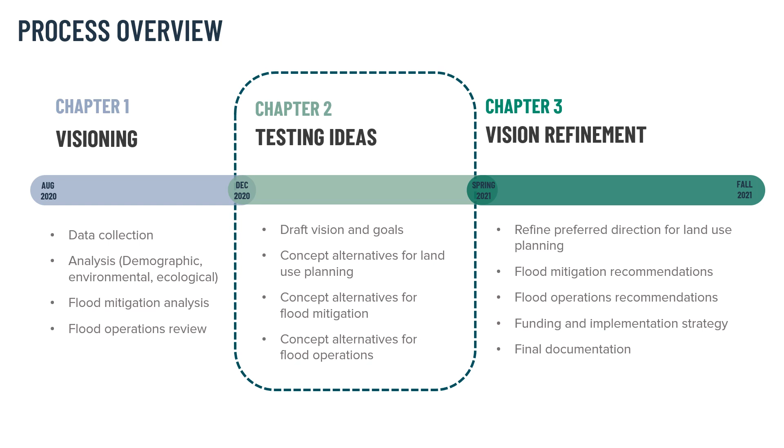The purpose of today's presentation is to describe and gather feedback on three main questions. First, what is being considered, including the priorities and guiding principles, the flood risks, and the type of solutions. Next, we'll go into the impact of flooding at a range of flood stages and consider the criteria to use when evaluating alternatives. Finally, we'll present examples of potential solutions that address two different levels of flooding.

The first is an array of options that would increase resiliency and reduce operational effort for major floods ranging from about 18 feet of stage up to 22 feet flood stage. The second set of potential solutions will consider a target elevation of flood stage 24 and what a continuous system of flood mitigation at that level may look like.

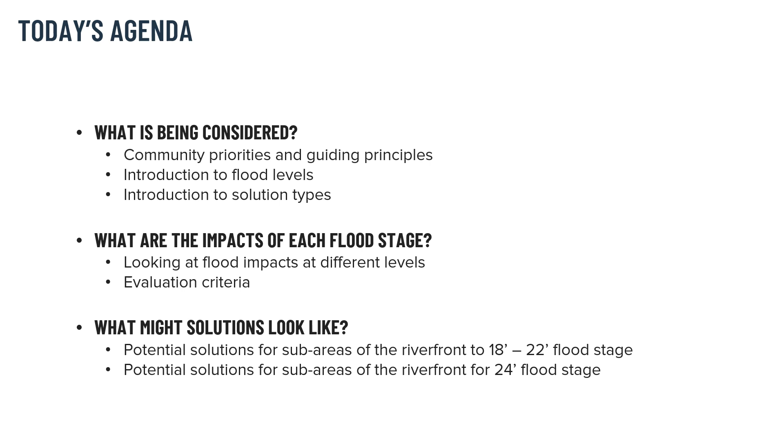So let's begin. Last fall, we reached out to a variety of stakeholder groups and the public through an online survey to ask a series of questions related to flooding, the city's flood response, and people's relationship to the river and the place where they live and work. These are some of the themes that came out of that effort.

When we asked people what the city's priorities should be in responding to high river levels, we heard access, specifically related to flooding impacts on transportation routes, the impact of flooding on businesses, community facilities, and infrastructure, and the impacts on people and residences. People noted many things that make Davenport special, including local businesses, outdoor spaces, relationships with the community, and the ability to get out and about.

When we specifically asked about how the riverfront could be improved to increase the number of visitors, we heard there needs to be more things to do, improvements to access, more natural areas to enjoy, some level of flood protection, and better maintenance and cleanliness of the riverfront.

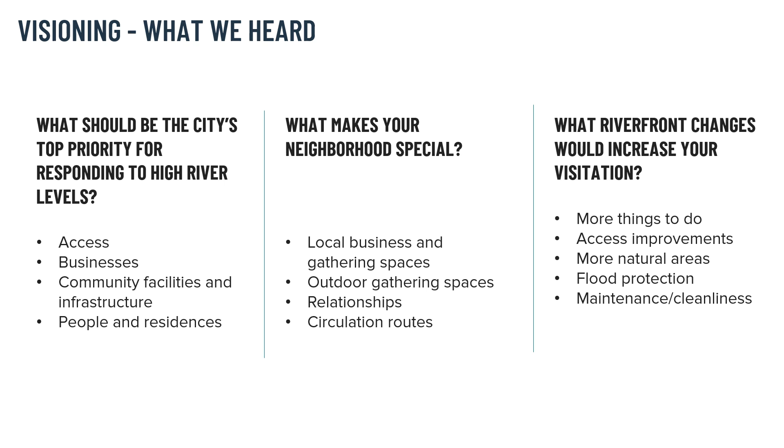After gathering data from a variety of sources and considering the input from the public, we worked with the city to develop a set of guiding principles to reference when developing flood resilience concepts. The four goals are listed here.

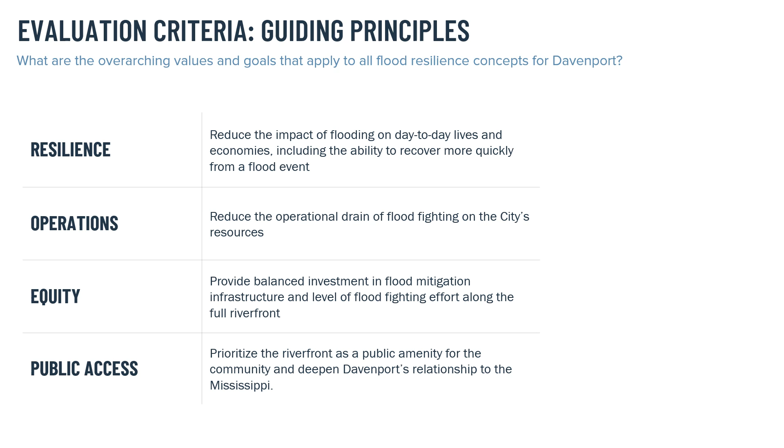Starting with resilience, we want to reduce the impact of flooding on day-to-day lives and economies, including the ability to recover more quickly from a flood event. We also want to reduce the operational drain that flood fighting has on the city's resources. In making improvements, there is a desire to do so in a way that provides a balanced investment in flood mitigation and flood fighting across the full riverfront. Finally, public access to the riverfront as a public amenity needs to be prioritized.

For the purposes of today's presentation, we're going to discuss flood mitigation efforts at three different levels based on flood stage. In the first level, we have major floods that range from approximately stage 18 to 23 feet, including all the major floods Davenport has experienced to date, including the flood of record in 2019, which reached stage 22.7. The second level is stage 24, which is approximately the 1% chance or 100-year flood event, a little more than a foot above the flood of record.

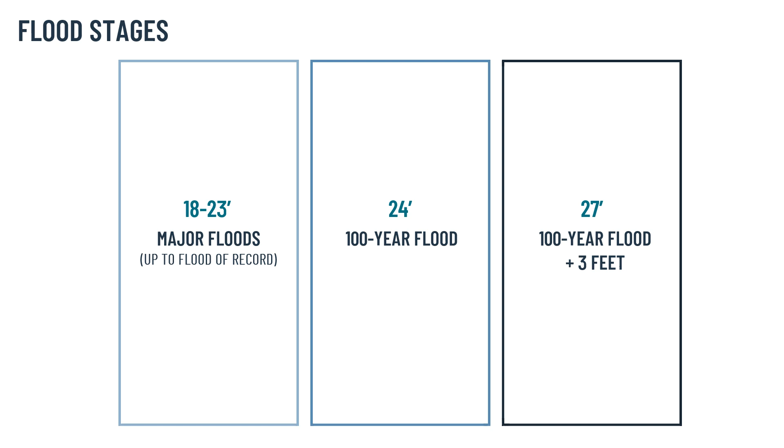And finally, the third level we have is stage 27 and up. Infrastructure to this level would be required if the goal were to build flood mitigation in the form of levees or flood walls that would have the necessary freeboard to be accredited by FEMA and remove areas from the regulatory floodplain.

In today's presentation, we're only going to focus on a variety of structural flood mitigation strategies aimed at reducing or avoiding the impacts of flooding. Non-structural mitigation strategies, such as changes to regulations or zoning, flood warning and response plans, buyouts, or flood-proofing of individual buildings, are not covered in today's presentation.

Finally, what we're going to present today when describing the concept alternatives are only examples of the many possible combinations of strategies that can be used to address flooding at any of the flood levels. Certain strategies are more relevant, feasible, or effective at different flood levels, but each has their place in a comprehensive flood plan.

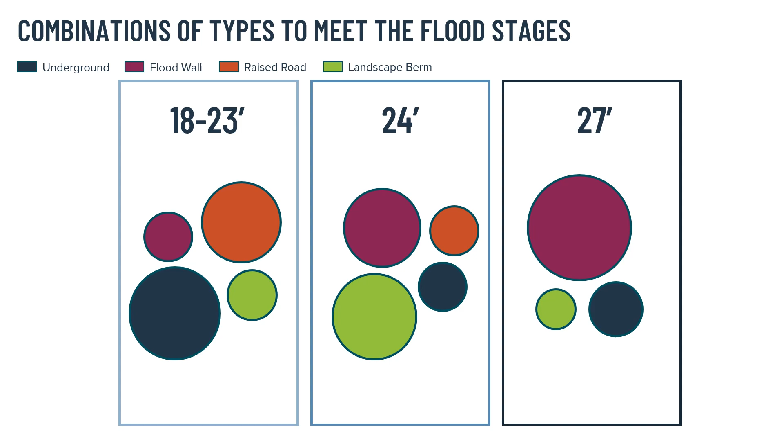So let's talk about flood risk and the impacts of flooding at the different levels. Recall the three levels of flooding being considered for today's presentation.

Flooding in the major floods category has occurred a number of times in the period of record, which dates back to 1878. In that time, the Mississippi River has reached flood stage 18 on 273 days and flood stage 22 on 18 days. Looking back over just the past 20 years, the river has reached stage 18 on 142 days and stage 22 on 7 days. As I mentioned earlier, the 2019 flood of record was stage 22.7.

As a point of reference, stage 22 is approximately equivalent to the top of the seawall upstream of the dam, up near the East Village. Flooding to stage 24 approximates the 100-year flood event, which has never been reached during the period of record. However, there is a 1% chance of the river reaching this stage in any given year. Finally, stage 27 would be the approximate target elevation for a FEMA-accredited flood mitigation system.

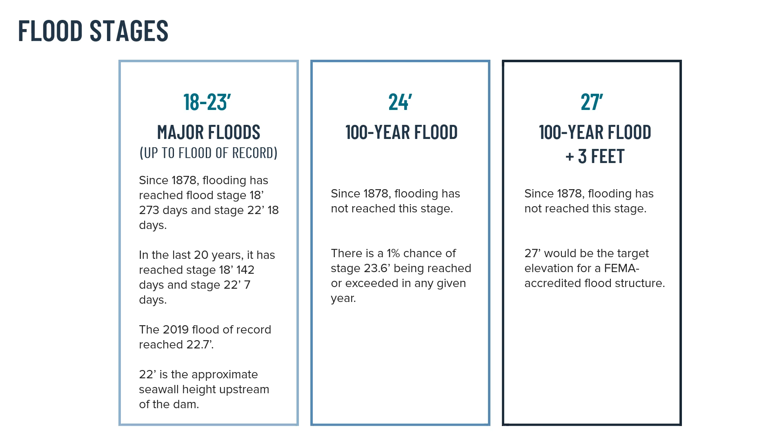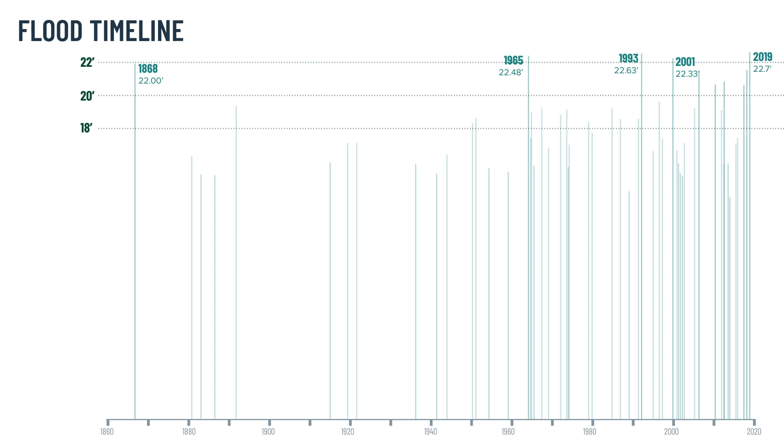So what does flooding look like in Davenport? Referring to the city's flood inundation maps, we can see that at stage 18, there start to be significant impacts to the riverfront parks and River Drive, and that flooding occurs in low-lying locations, even away from the river, due to water backing up through the storm sewer system and surcharging onto the roadway.

A significant effort in flood fighting is made by the city at or below flood stage 18 as well. In fact, over half of the city's flood response actions occur at or below stage 18, representing a significant investment of manpower and materials.

By stage 22, the flooding extends well inland of the seawall, significantly impacting transportation routes, access to the Government and Centennial bridges, as well as homes and businesses.

At stage 24, water would be over the seawall even upstream of the dam, reach the main concourse of the River's Edge Center, and impact the water pollution control plant, and as you can see, inundate several city blocks north of the riverfront.

And by stage 27, the river would flood even further inland and reach the bottom of the Government Bridge deck.

As we consider the impact of flooding at various stages and the potential strategies that we might employ to meet the goals of improved resilience, reduced operational drain, equity, and public access, we need to put in place a series of criteria to measure and evaluate the options.

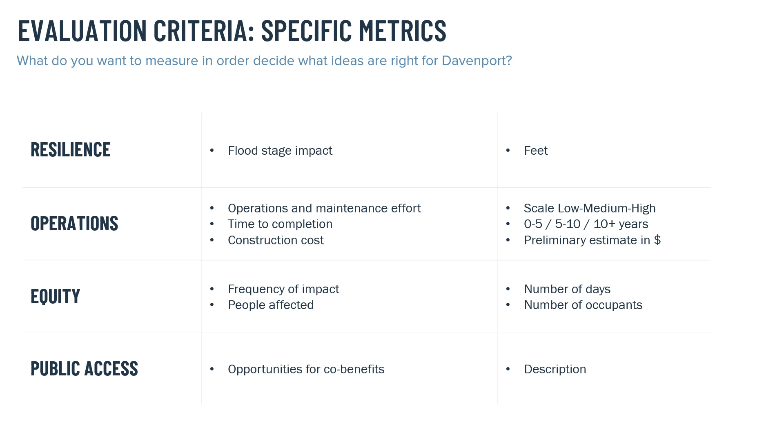In terms of equity, we can measure the number of days an area has been flooded in the past and also consider the people affected by looking at metrics such as the number of occupants. Finally, when considering public access, we take a more subjective view of how each potential strategy may have opportunities for co-benefits that preserve or enhance the public's connection to the riverfront.

Before we get into the discussion of potential mitigation strategies, I want to pause here. We want your feedback on the city's priorities and goals for improved flood resilience. Please share with us your priorities when it comes to developing the flood strategy.

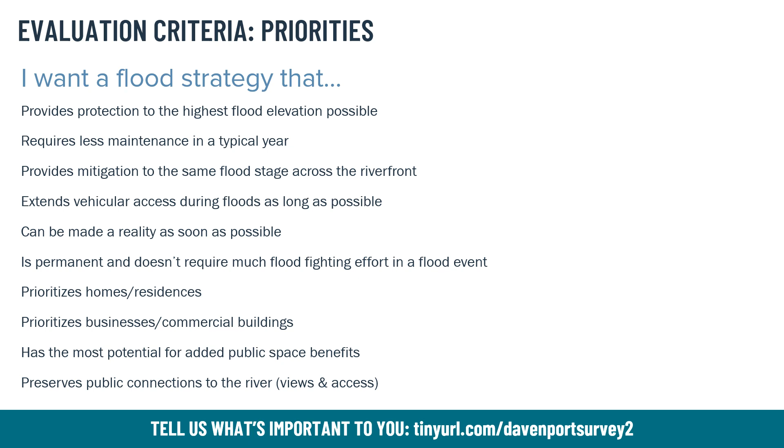The next part of the presentation will describe a number of concept alternatives for structural flood mitigation. The types of strategies we are presenting here fall into 4 main categories: underground infrastructure, raised roads, flood wall, and landscape berm or levee. Underground improvements generally involve adding gates on storm sewer outfalls to prevent river water from backing up through the storm sewer system and inundating low-lying inland areas. This often requires some reconfiguration of the storm sewer system, the addition of the gate, and potentially permanent pumping to discharge stormwater collected in the interior area during rainfall events.

Raised roads are just like they sound. They involve building up the road elevation above the flood level. Landscape berms and levees can be used when a higher level of flood protection is desired and where there is adequate space. These can often be incorporated into public parks or green spaces. Finally, flood walls are often employed when that higher level of protection is needed and space is at a premium.

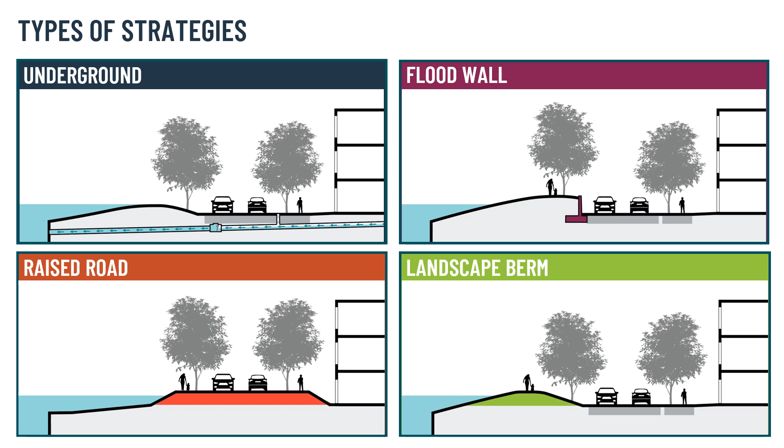It is unlikely that any one strategy would be used exclusively, and more likely that a combination of strategies are deployed. At lower stages, underground improvements and road raises tend to play a larger part, whereas flood walls and berms become more important at stage 24. Once mitigation measures become taller, like at stage 27, flood walls tend to dominate due to the lack of space required for other types of infrastructure.

Structural mitigation improvements could be made with either of two quite different visions in mind for the future of flood response in Davenport. The first vision may look to continue Davenport's history of flood response, but to make permanent incremental improvements that increase resiliency, improve access, and reduce flood fighting effort and costs, without creating any continuous riverfront flood protection system.

This strategy would focus more heavily on storm sewer and roadway improvements and have relatively lower capital costs. The second strategy might envision setting a target flood elevation for the entire riverfront, likely above the flood of record, and build a continuous flood mitigation system. This would come at a much higher upfront cost, but would greatly reduce flood fighting efforts and provide widespread flood protection through underground utility improvements, seepage mitigation, and above-ground flood walls and berms. The options run along a continuum from incremental infrastructure improvements all the way to significantly transforming large portions of the riverfront for permanent flood mitigation purposes.

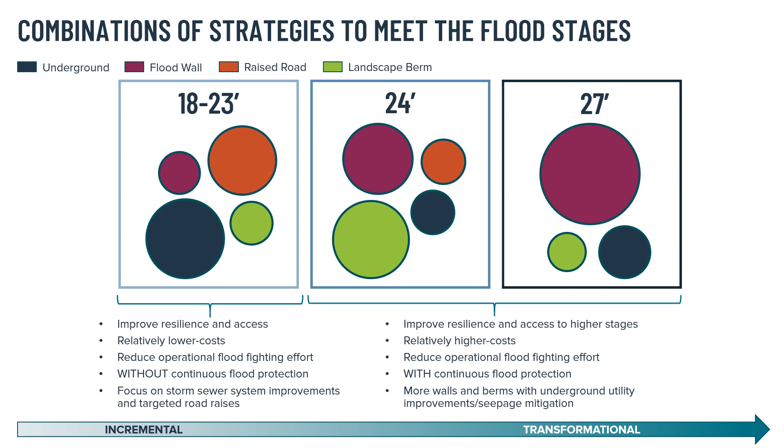We'll start with examples of incremental improvements, discussed in four different sub-areas of the riverfront, starting with Area 1 on the east end and moving downstream to Area 4 on the west end.

Starting in Area 1, in the village of East Davenport. This area currently experiences road flooding on River Drive and Mound Street as river water surcharges out of the intakes at stage 19.5. One strategy to keep the road open would be to separate the upstream storm sewer from the floodplain storm sewer and install backflow prevention on the floodplain storm sewer system. Temporary or permanent pumping would be needed during rainfall events. This option would keep the roadway open for an additional 2.5 feet of stage until flooding came over the seawall. The project has a relatively low construction cost, but would continue to require some level of operations effort to close gates and set pumps.

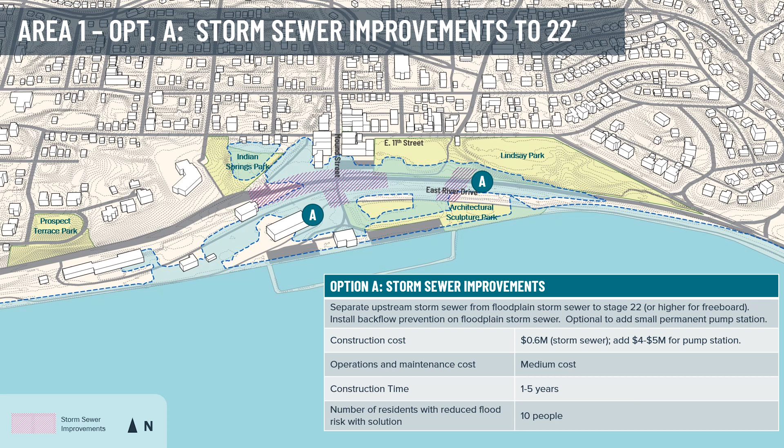Another option to keep River Drive and Mound Street open to higher flood stages would be to raise the low portion of the roadway. Raising the roadway approximately 3 feet would keep River Drive open to stage 22.

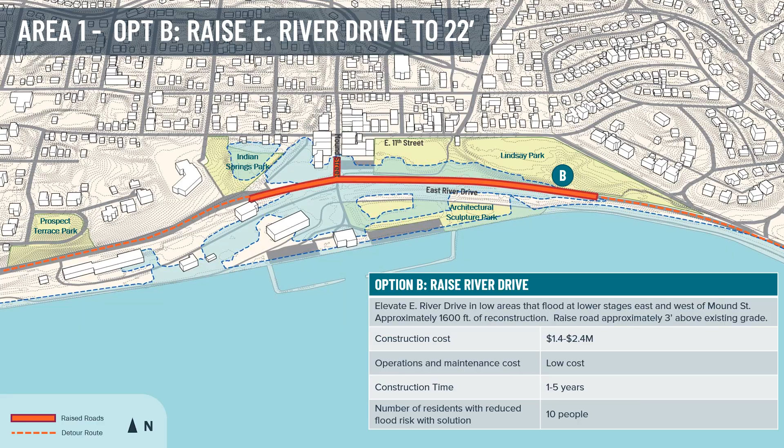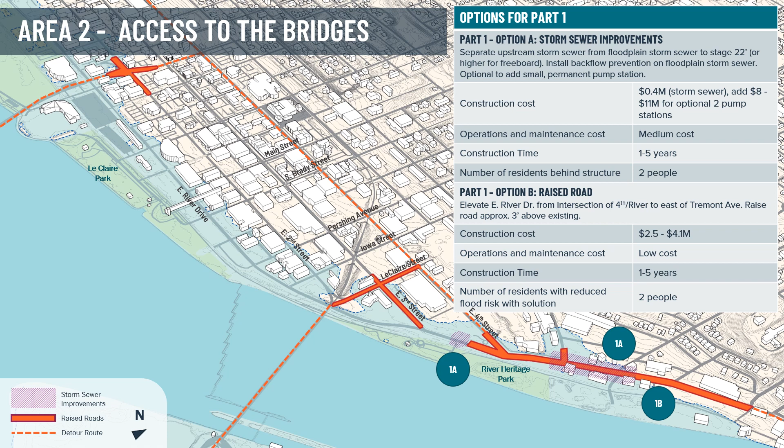In addition to keeping River Drive east of 4th open, targeted road raises at LeClaire and 3rd and at Gaines and 2nd could provide permanent access to the Government and Centennial bridges from 4th Street up to stage 22.

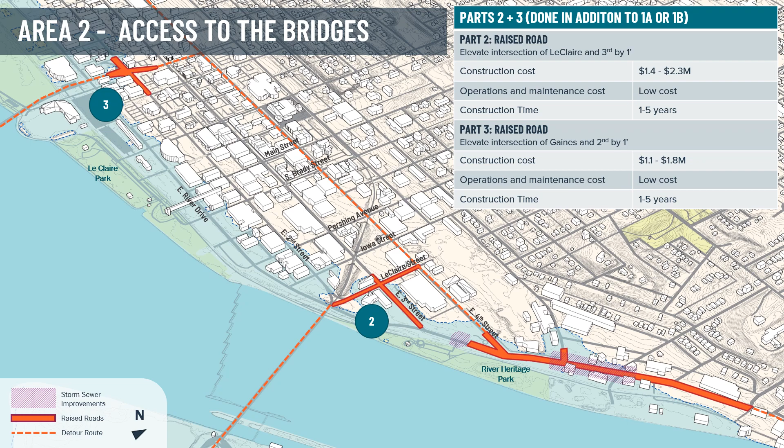Looking at incremental improvements further downstream now, in the area from Gaines to Division, there are several opportunities for storm sewer improvements. For example, river water that has backed up through the storm sewer system begins to flood the roadway on Myrtle at stage 14.5, and at River Drive and Marquette at stage 15. By separating storm sewer systems and installing backflow prevention, this section of River Drive could remain open until overland flooding occurs at around stage 18, a gain of 3.5 feet of stage. Changes to the configuration of the storm sewer system could also simplify the flood response and pump operations.

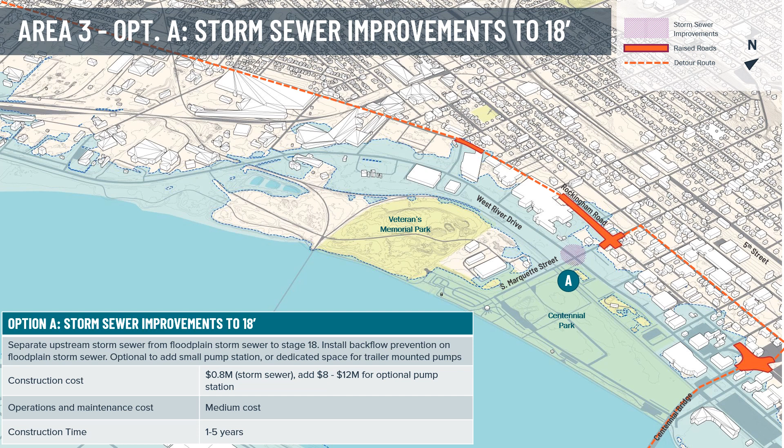Other incremental improvements that could be made in this area include road raises on 2nd Street and Rockingham Road to create a longer continuous section of roadway that sits above flood stage 22 for better access during flood events.

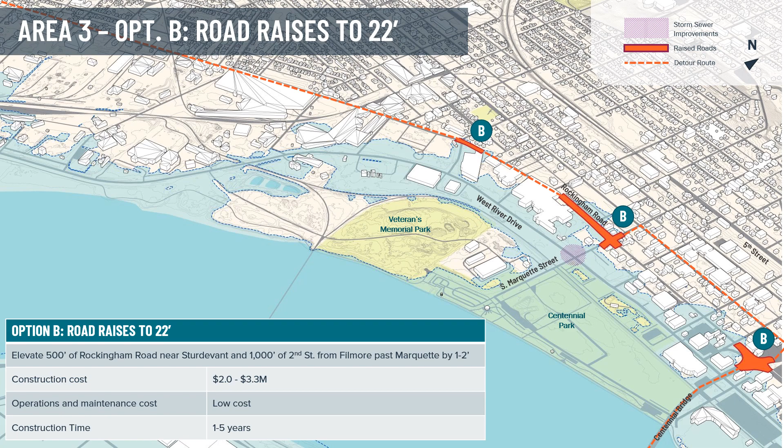Moving on to Area 4, west of Division into West Davenport and the Credit Island area. One incremental improvement that could be made in this area would be improving access to Credit Island by reconstructing the causeway with more flood-resilient materials so it could stay in better shape and be accessible sooner after a flood event. Better flow into the slough and ecological uplift could also be realized through the addition of more culvert area or a bridge opening.

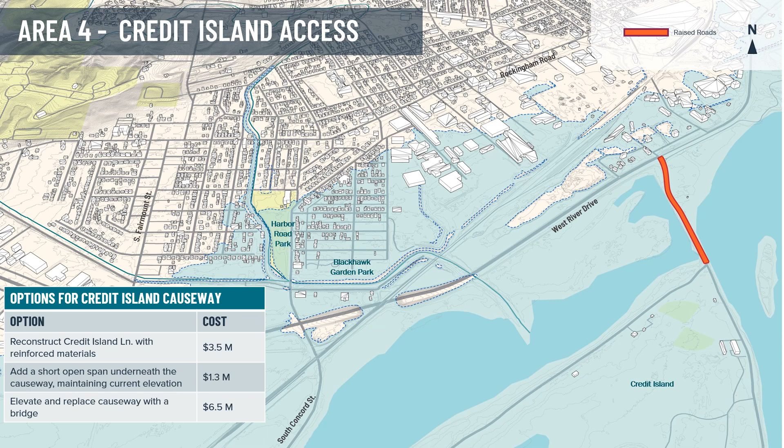So what is gained by making these types of incremental infrastructure improvements? Using the examples provided here and referencing previous studies, for an overall investment in the range of $12 to $18 million, there could be improved access to the Government and Centennial bridges. The city could delay the start of flood fighting in certain areas until higher river stages, which would reduce both disruption to the public and labor costs.

The city could establish a permanent detour route across Davenport that would be open to stage 22, capitalizing on some strategic sections of road raises. And finally, the city could fix and rehabilitate its existing stormwater pump stations.

Of course, the options discussed here are not the only options that could be employed in this incremental fashion. There are areas where landscape berms or flood walls could provide similar types of benefits at strategic locations that would reduce the overall flood response effort through eliminating or simplifying flood fighting actions or increasing the flood stage at which flood actions need to commence.

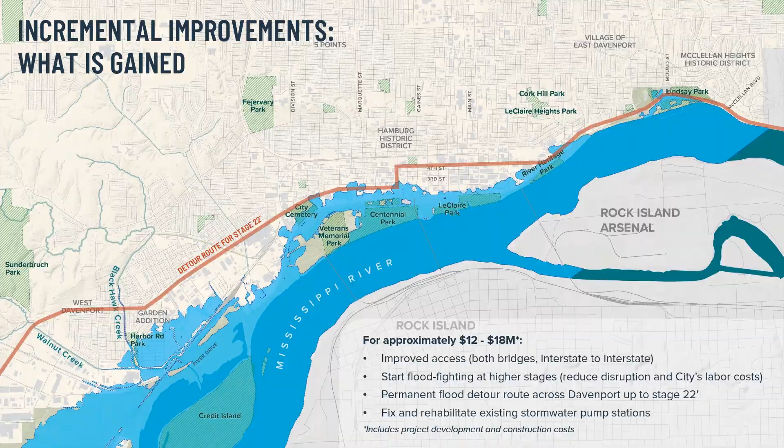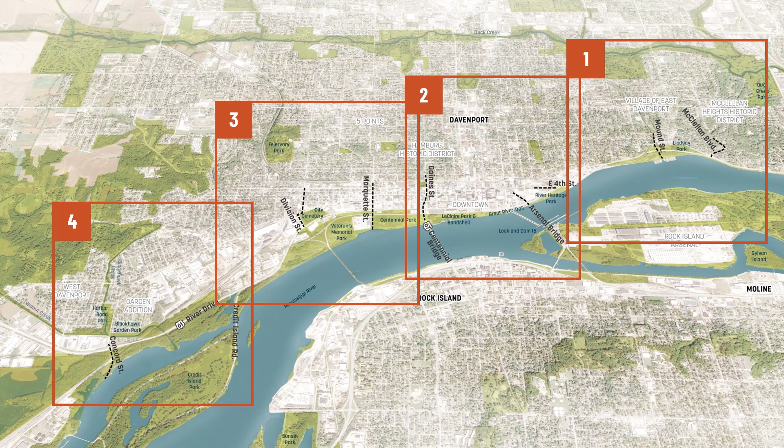Switching gears now, we want to provide examples of strategies that might be used if the goal were to provide a continuous system of flood mitigation along the riverfront, in this case to stage 24. Again, we'll be looking at the areas along the riverfront from east to west, starting in the village of East Davenport.

Before we dive into the various strategies, one concept we want to make clear is that when constructing any type of continuous flood mitigation system, there are required underground improvements that must be made. These include reconfiguration and backflow prevention for the storm sewer system, addressing all the other underground utilities that cross the line of protection, installing seepage mitigation, and addressing interior drainage during coincident rainfall events. That can be done through either temporary or permanent pump stations. For clarity, these improvements are not shown on the subsequent maps, but they are an integral part of building any above-ground improvements that will be discussed, and they are often just as expensive to implement.

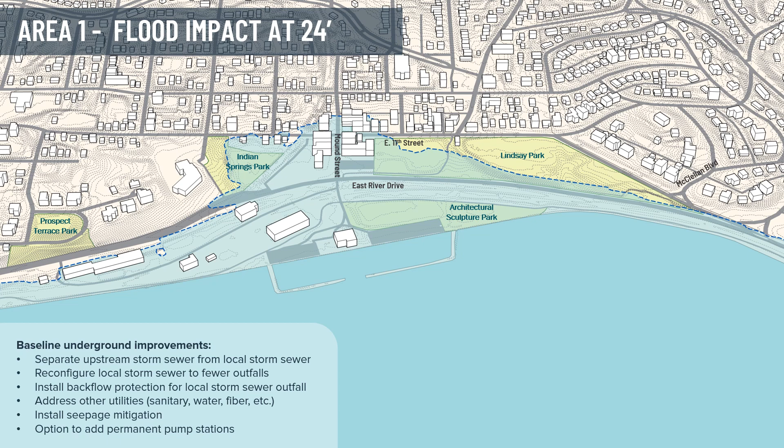One option for this area would be to build a flood wall north of River Drive that would stretch east and west of Mound Street to tie into high ground and would include a removable road closure.

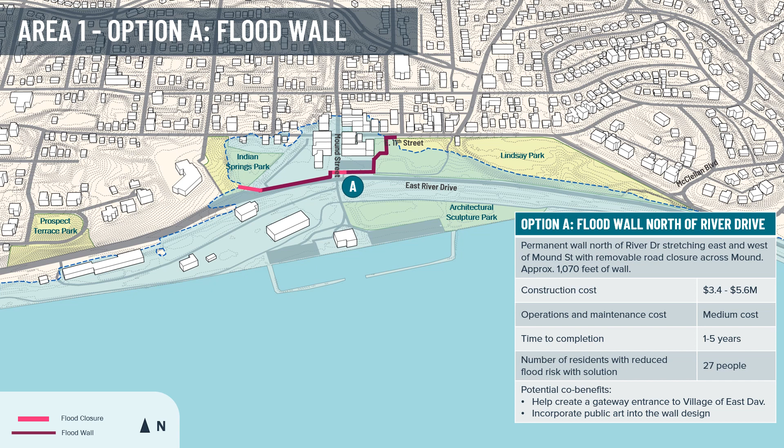A variation on this alignment north of River Drive would be to replace sections of flood wall with landforms in the areas with adequate open space.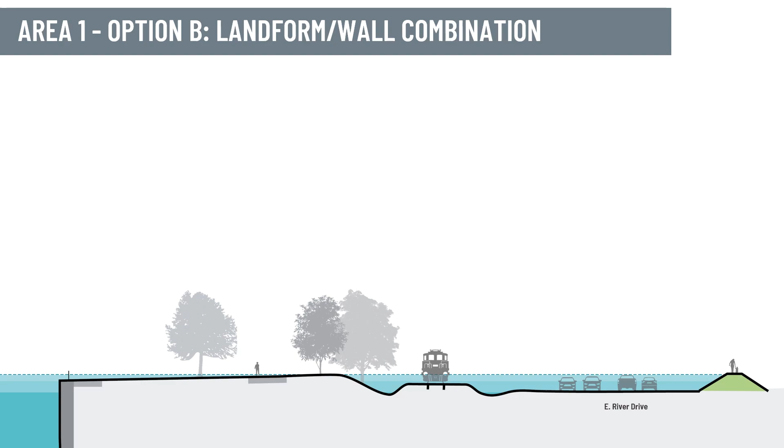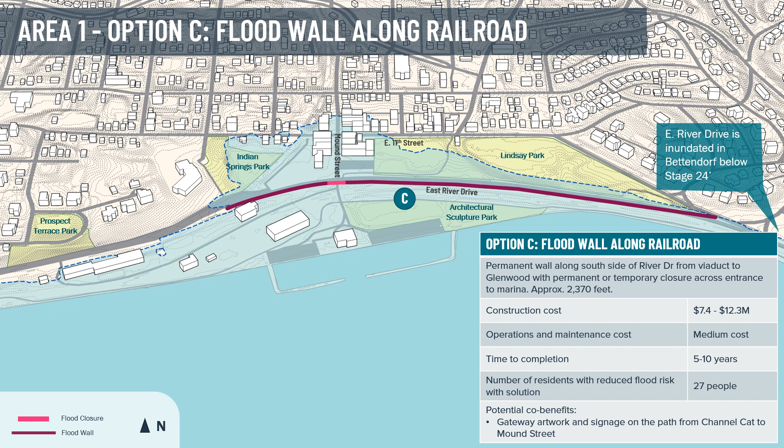A third option for this area could be a flood wall along the south side of River Drive, between the roadway and the railroad, with a removable closure across Mound Street. The length of this wall would need to be longer than the alignment on the north side, and therefore has a higher cost.

In section view, this option would look something like this. While this alignment would keep River Drive dry to stage 24 near the East Village, one item to note is that River Drive is inundated in Bettendorf below stage 24.

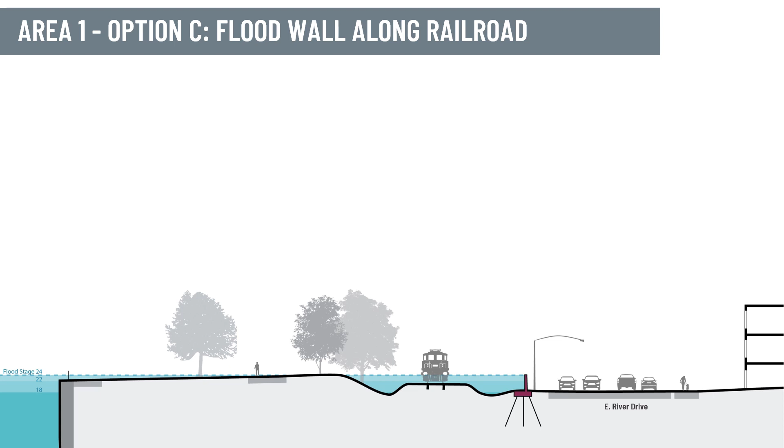One more option for this area would be to raise River Drive itself for the extent that it floods up to stage 24. This would require some reconstruction of Mound Street as well to tie in.

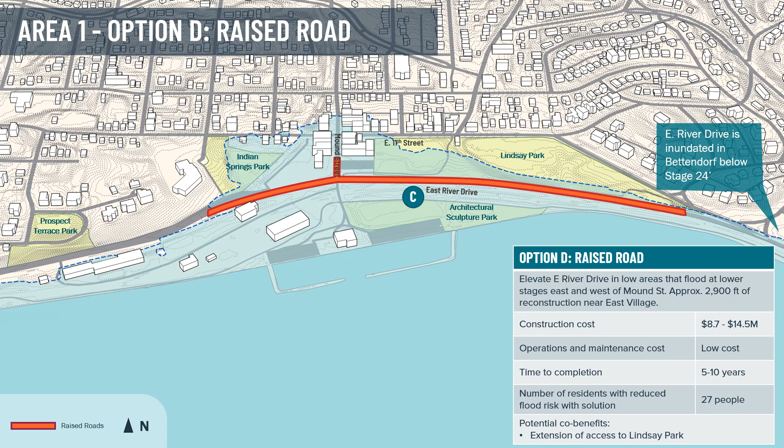In section view, the raised road option would look something like this. Again, East River Drive in Bettendorf would still flood below this stage.

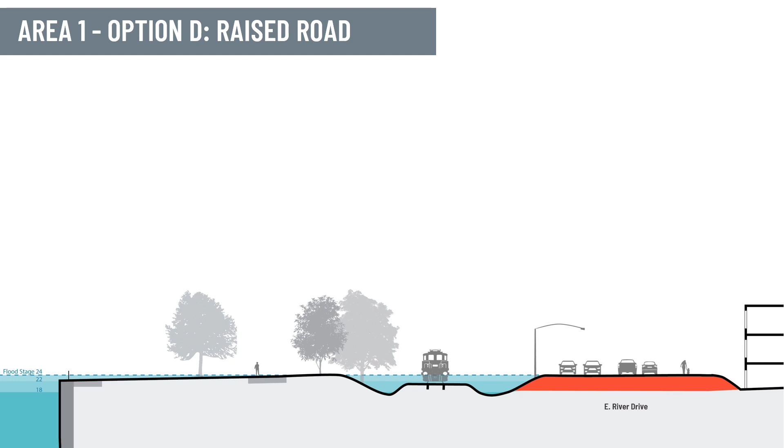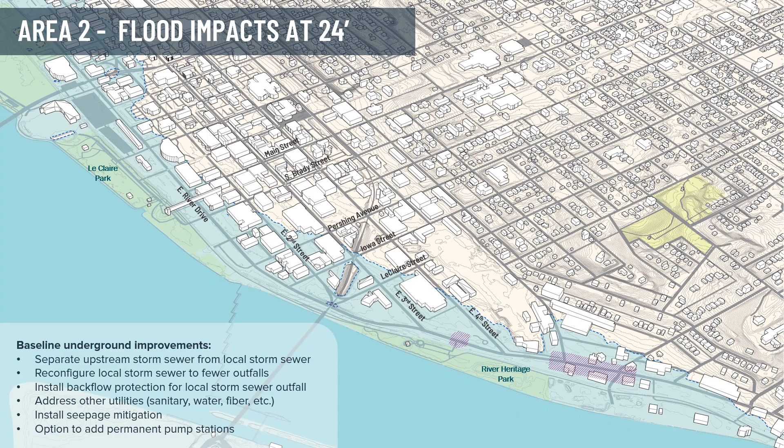Moving west now to look at options in Area 2. Again, I remind you of the baseline underground utility and seepage mitigation improvements that must be completed with any of the above ground options. You can see on this map the large area of impact at flood stage 24, extending a couple blocks inland from the river, which looks something like this in a section view.

The first option for a continuous line of flood mitigation in Area 2 seeks to provide access to the city's facilities located along River Drive up to stage 24. Starting at the east end, a flood wall option could include an alignment along the riverfront trail that would tie into high ground near Bridge Avenue and at the Government Bridge abutment, and then would continue west of the bridge along the north side of the tracks through the riverfront parks until it tied in with the flood wall at the ballpark and then continued on into Area 3 to the west.

Some complicating factors that add to the cost of construction in this area are many underground utilities in the corridor and the need for flood closures across several roadways. Keeping alignment on the north side of the tracks, however, would allow for interim tieback locations to the north without having to cross the railroad tracks if the overall alignment were completed in several projects phased in over time.

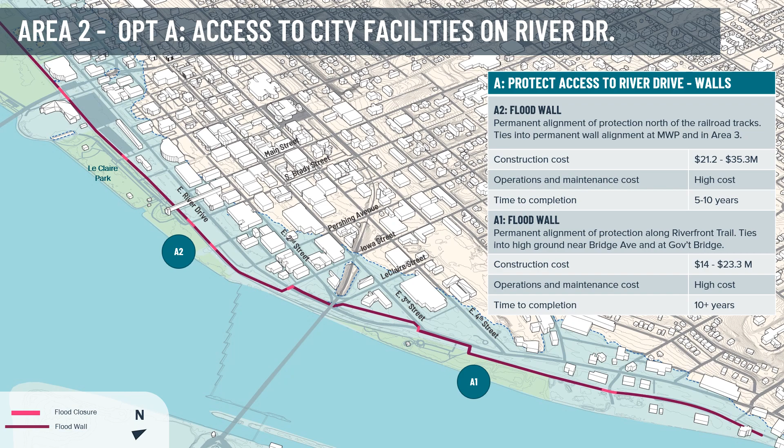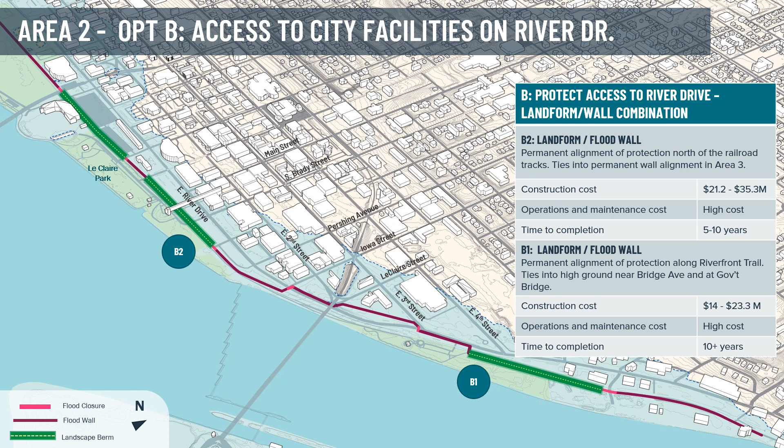A variation on option A, option B incorporates more landforms into the line of protection and less flood wall. The option of using berms instead of flood wall near the Sky Bridge is shown in this section. Grading of a berm reduces some of the usable space in the park compared with a flood wall.

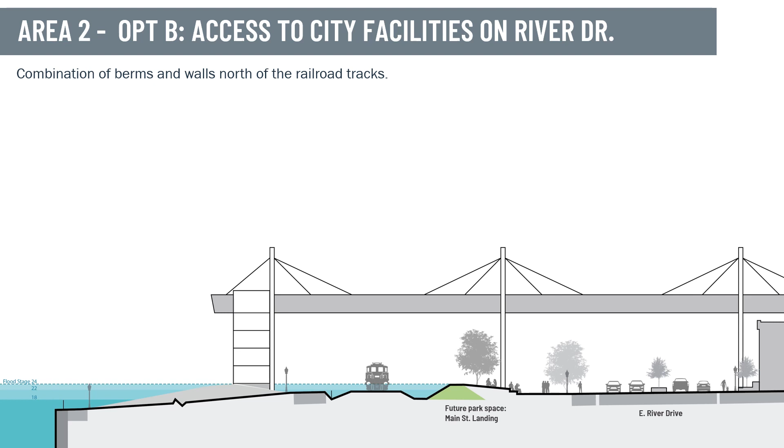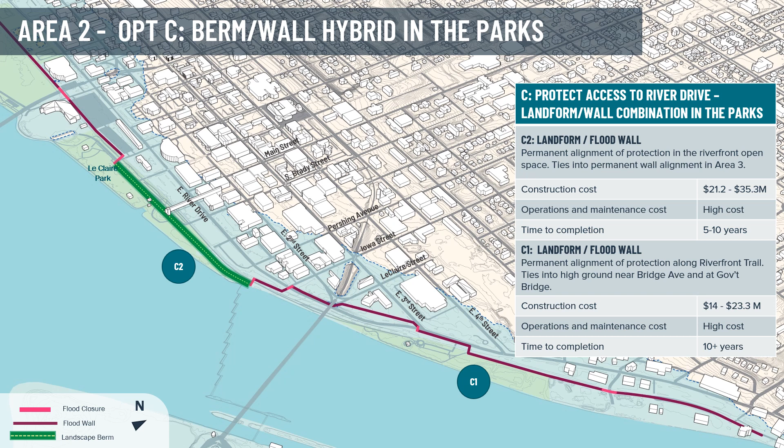This option moves the alignment south of the tracks through the parks in the form of a landscape berm, seen here in section view as elevated park space on the river side of the railroad tracks. The numerous at-grade rail crossings will play a big part in determining the grading options north and south of its tracks for any of these options.

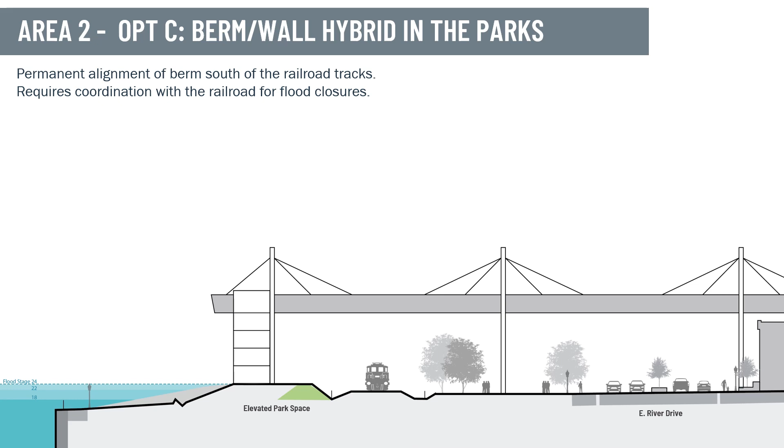Moving west into Area 3, from Gaines to Division, you'll see similar options as were presented in Area 2. Again, we remind you of the baseline underground utility and seepage mitigation improvements that must be completed. Area 3 tends to sit lower in elevation than Areas 1 and 2, as you can see in the extent of the flooding at Stage 24.

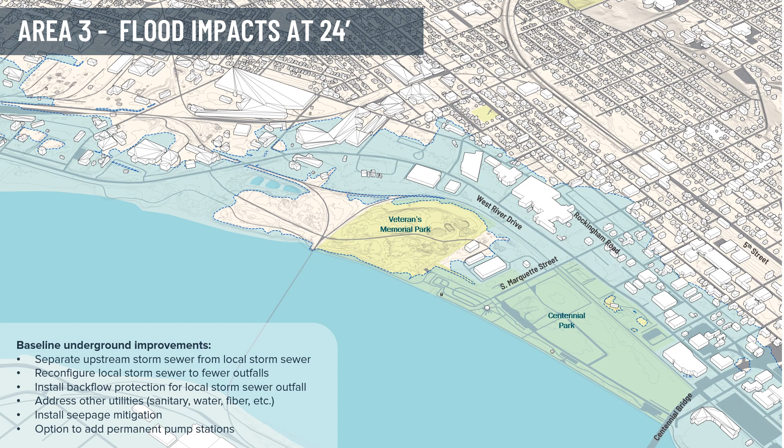Option A for this area has more of a flood wall focus, extending the wall from Area 2 past River's Edge in Centennial Park, then south along Marquette Street around the Public Works facility, and west until it ties into high ground in Veterans Memorial Park. While no above-ground improvements would be required in the area of high ground, seepage mitigation would be needed across its length. Flood wall would then continue west until it tied into an elevated river drive.

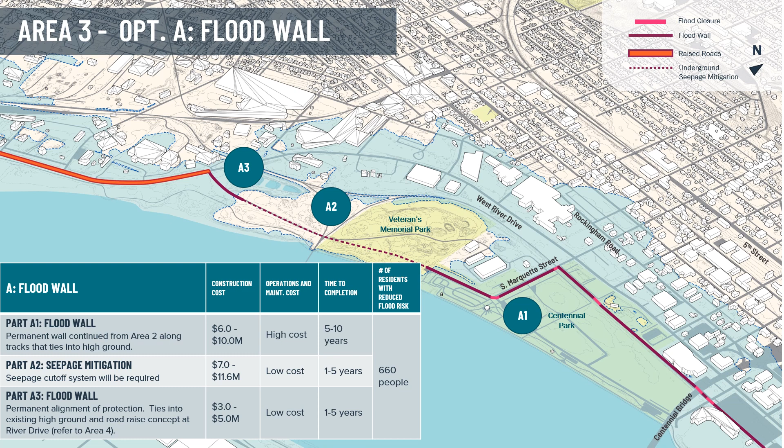Option B is a variation on option A that includes more landforms in the park and less wall.

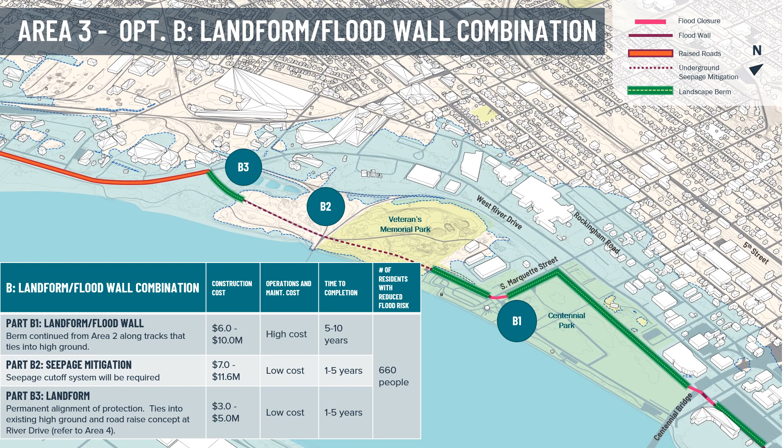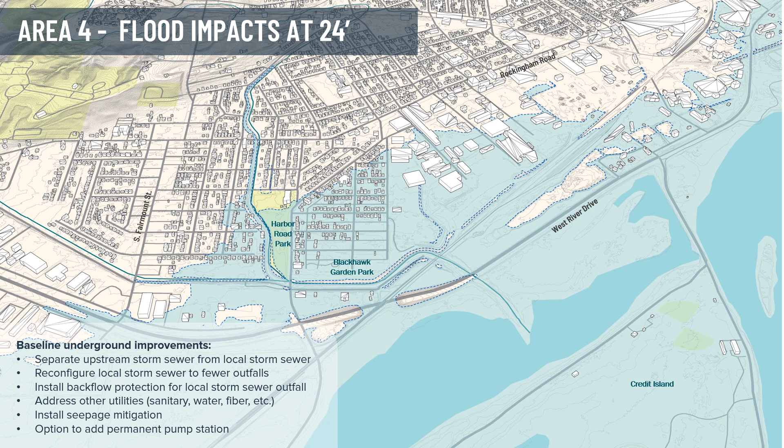Moving on to Area 4, west of Division and into West Davenport and the Credit Island area. In Area 4, we once again have the same baseline underground utility and seepage mitigation improvements that must be completed. This area is more open with more ditches and channels and includes different types of storm infrastructure like culverts under the railroad. It also includes existing flood mitigation infrastructure along Blackhawk and Walnut Creeks.

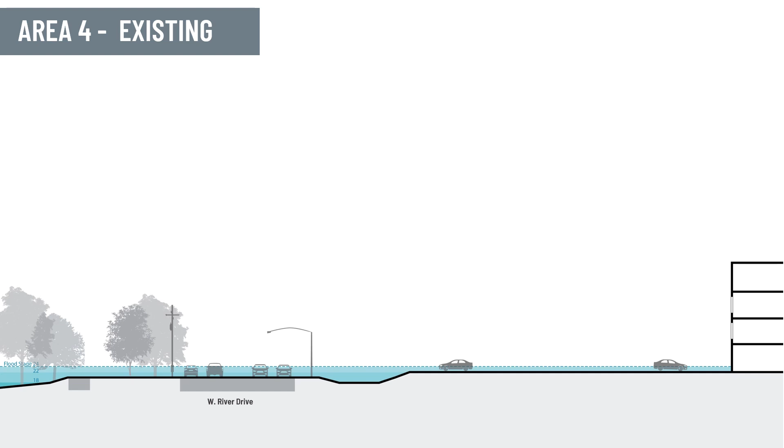One option for flood mitigation through this section would be to raise River Drive from west of the underpass to Blackhawk Creek, then extend a line of protection along the north side of Blackhawk Creek to tie into the existing Blackhawk Creek berm. This alignment would require a railroad closure. River Drive would also be raised past the railroad overpass to approximately South Fairmount Street.

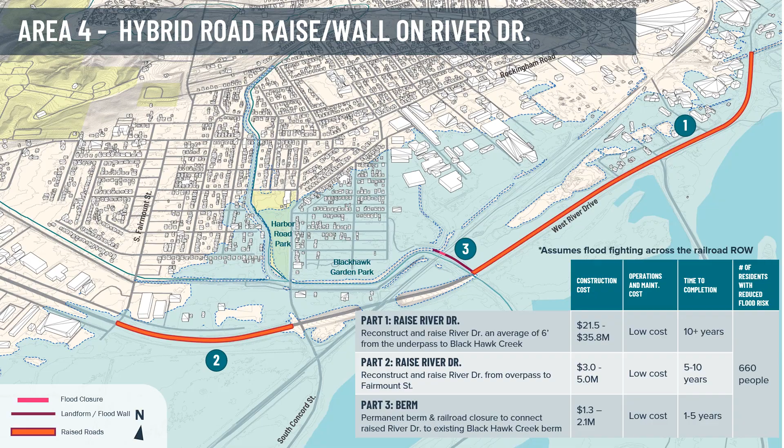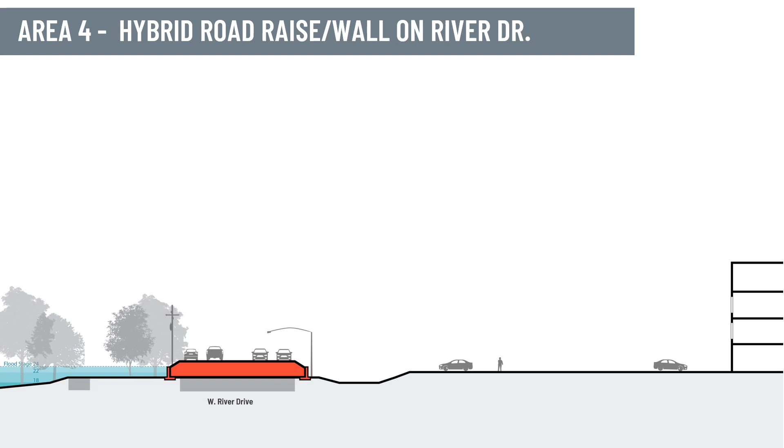The road raise might look something like this in section view, potentially utilizing vertical walls where there are larger changes in grade, in order to reduce the width and impacts to adjoining natural areas.

As mentioned earlier, flood mitigation berms exist along Blackhawk and Walnut Creeks in the Garden Addition area. To be part of the complete system to stage 24, improvements to this area would include the berm tie-in noted previously, closing a gap in the berm and adding temporary road closure at the South Concord Bridge, and making the necessary maintenance and seepage mitigation improvements to the existing berms.

In addition, numerous interior drainage improvements could be made. Through a reconfiguration of the storm sewer, 4 outfalls to the creek could be eliminated and all storm water directed to a detention area and a single pump station with a gated outfall near location A. Rehabilitation improvements to the pump station itself, mentioned under the incremental improvement section, could also be made.

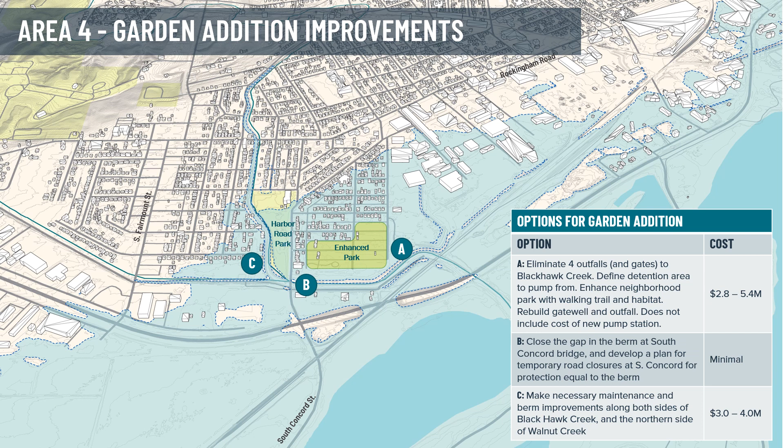So when you put it all together, a continuous, comprehensive line of flood protection could look something like this, with a cost range of $220 to $370 million to cover the entire riverfront end-to-end to stage 24. This would have no effect on flood maps or flood insurance.

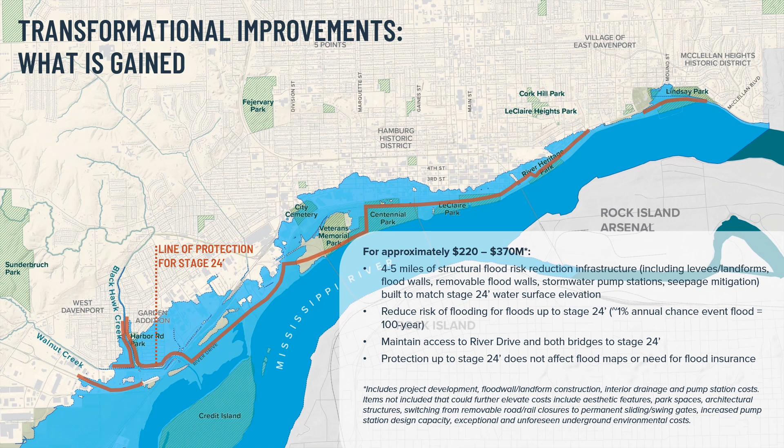To reach that level of mitigation, an additional 3 to 4 feet of height on flood walls and berms would be required at additional cost. Continuous options like this could also be built to lower flood stages at somewhat reduced costs. The continuous system would include flood walls, landforms, interior drainage improvements, and pump stations, and really be a comprehensive system.

Today we've presented some background information and a number of concept alternatives for structural flood mitigation. Now we want to hear from you before we move further along in the process.

Our next steps will include gathering feedback from the online survey and stakeholder meetings, refining a preferred direction for land use planning, developing the recommendations for flood mitigation and flood response operations, and putting together a funding and implementation strategy, and finally bringing it all together into a flood resiliency plan.